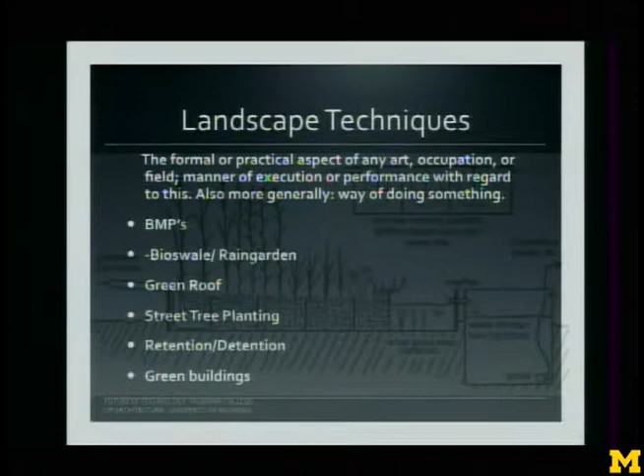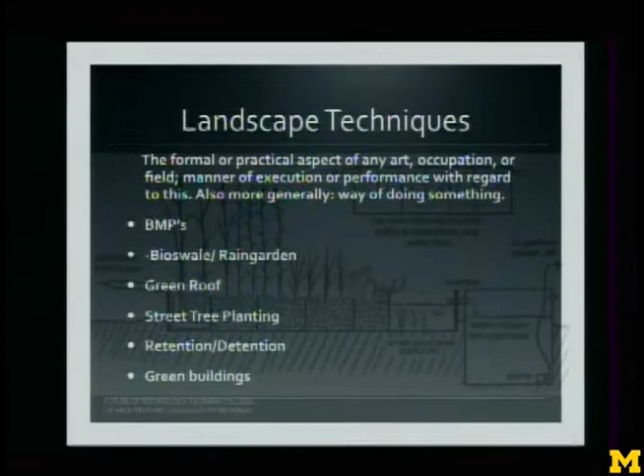I began to think about some things that are worrisome to me in landscape architecture - the standards have been created through these larger technological advances. Within landscape architecture there's almost a punch list of things we make, and we call them new technologies. These might fall under BMPs - bioswales, rain gardens, green roofs, street tree planting, retention, detention, green buildings, green facades, etc. And we lose sight of the actual real technological advance.

I'd like to suggest that maybe we should return to a larger discourse and think more about how we got to this place, and really begin to think about making landscapes that are much more performative - performative in a way that comes out of linguistics, where there is a response. The performer doesn't perform until they open their mouth or before they begin to dance or sing. This idea that the landscape can be activated, through human use, but also through a highly collaborative exercise between environmental designers.

I'd like to start with this first project. For me, how do we make these things disappear and become larger, more versatile interventions that allow us to experience real places and real things?

It's very interesting working on the new De Young Museum with Herzog and de Meuron. What's fascinating to me is that everybody always talks about the skin as this fantastic technological advance, but it's actually the building's base isolation - there's a 15-foot trench around the entire building. During an earthquake, the building will actually dance. Most people don't know that; it's not recognized within the dance of design.

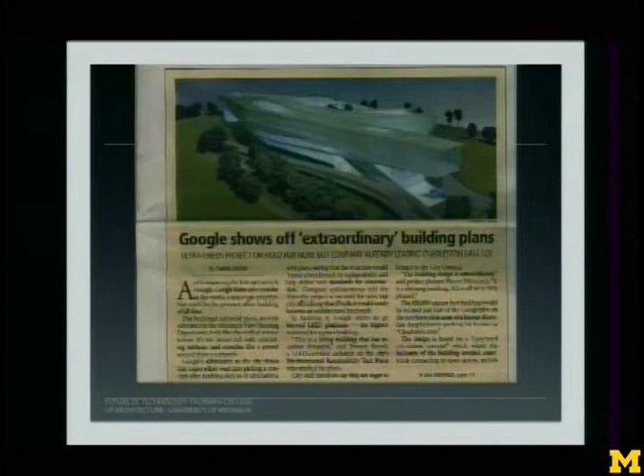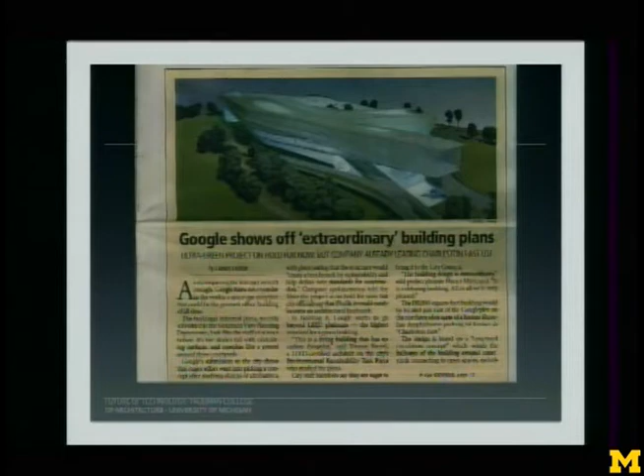This new building, I can only talk about this article here. This new building was developed about four years ago, and the idea between landscape architect and architect was a building that could think for itself in an environment set in a marsh, and could the building actually think? Through this rigorous collaborative effort between architect, engineer, and landscape architect, could we arrive at a new way to express multiple technologies rather than a single thing?

So basically I looked more specifically toward biomimicry as a new technology and a way to think about the Bay landscape. Here, scalability, as some urban designers might call it—can we work one-to-one with the environment in which we're actually making a building?

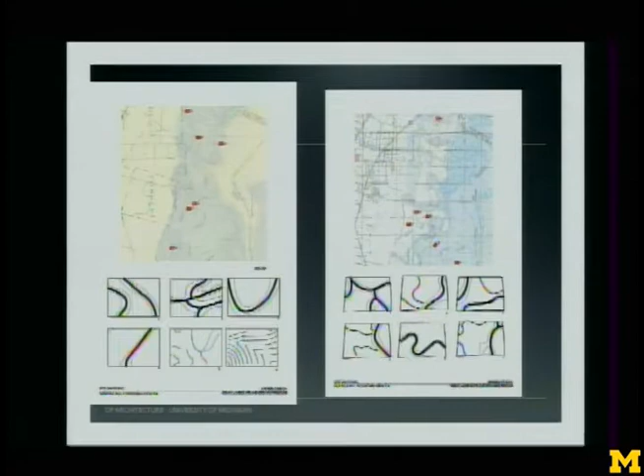These are basic samples from the San Francisco Bay at the same scale as the site. What you begin to see is one monumental move that's tied back into the dendritic pattern of the actual bay and the way water moves through it.

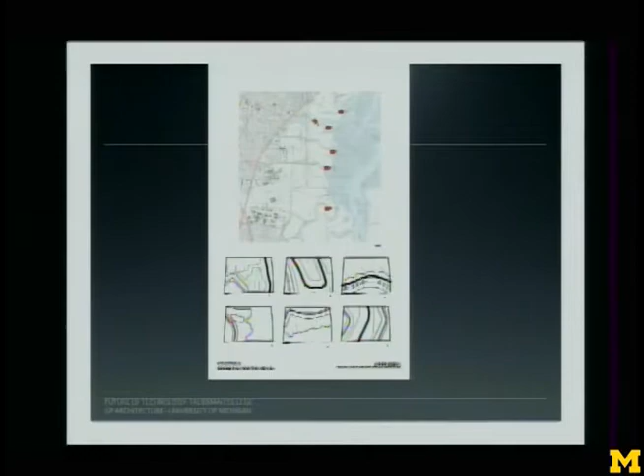This seamless experience, merging these technologies together, gave us one thing, which ended up being this larger bioline condition—basically a ramp with a flow-through planter that goes from the roof all the way to the ground. Its length is based on the scale of the dendritic patterns at the bay, so it's working one-to-one within that system.

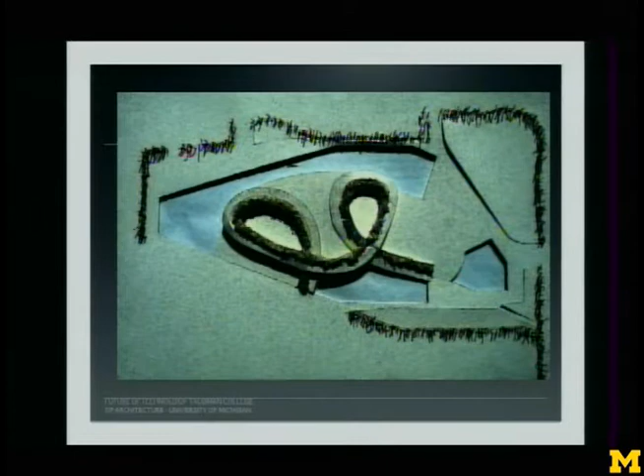The technologies that allow that to happen, from rainwater harvesting through facade studies, literally disappear, and we're enmeshed in the experience of the bay through these technologies.

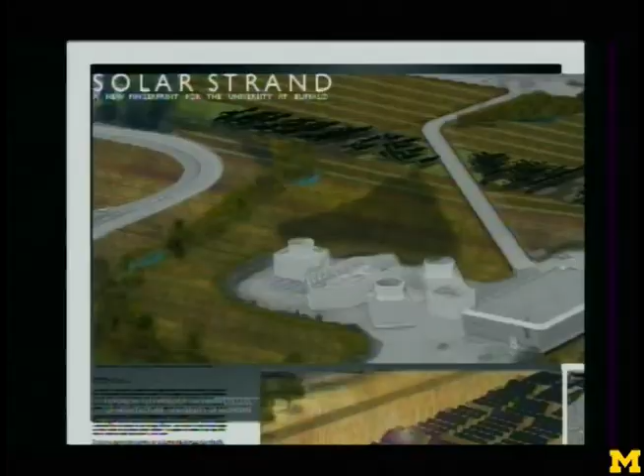This next project is a little more simple. The collaboration here is through a design builder and a landscape architect, myself, and we won a competition to place 5,000 PV panels, 3 by 5 feet, in a landscape for the University at Buffalo. What's interesting is that through the competition we understood the solar technology, but no one had an understanding of the landscape technologies at play at Buffalo.

You have to understand the history of the University at Buffalo: a landscape architecture firm designed this new suburban campus, and they basically moved a creek or river about 500 yards one way and filled the site in to put the new campus there.

So what happened with all this new alluvium is that nothing can grow there, because it's all bad dirt. For us, with the Solar Strand, we attempted to talk about the technologies that could restore this landscape back to its fertile origins, allowing even the simplest tree to grow. Through this we codified how the Solar Strand could actually sit within this landscape.

We used the DNA fingerprint and wrote a script that would allow us to place the panels in a quarter-mile-long row within this new regenerated landscape. This landscape will be constantly changing because they're constantly making new dirt, and this new dirt is tied to the solar array.

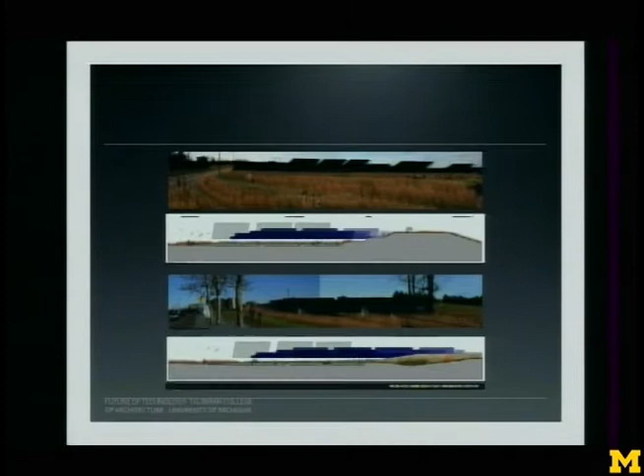But within that, this new regenerative landscape has the techniques to regenerate it hidden and embedded within it, and these two things create one experience. Your experience might be walking through this new quarter-mile-long solar array, but below your feet this landscape is recharging and constantly changing.

We just made a decision last week to not cut any of the landscape and let the native species find themselves there. We'll basically cut it once a year and let anything and everything grow there. Right now we have 63 species of plants that will volunteer.

Now we're in the construction phase, basically remaking the dirt here, and thinking about how the panels will actually sit through this codified new landscape.

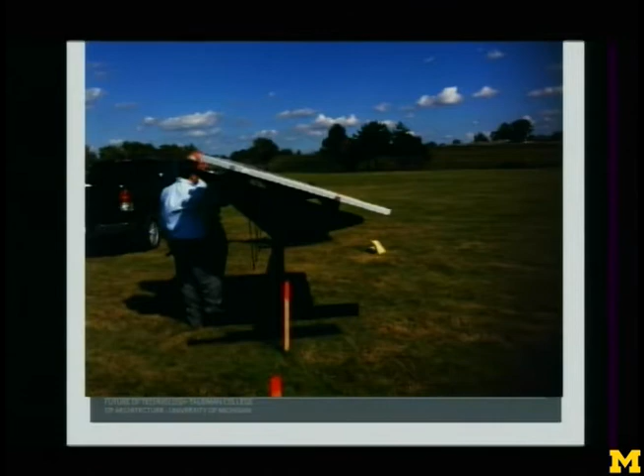And lastly, I wanted to talk about this final project, which is a new visitor center in downtown San Francisco. And this, again, is a collaboration between engineer, architect, and landscape architect.

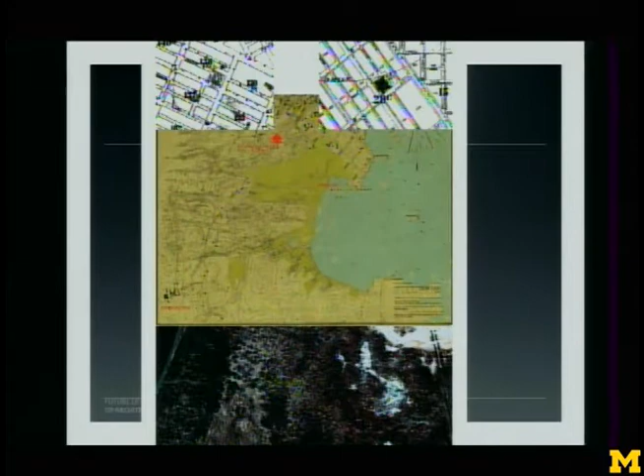Here, the technologies being used have to do with historic preservation, but also the ecology of the Bay Area. The new mint is old mint. It's about 150 years old, one of the few buildings that survived the San Francisco earthquake of the early 20th century. It housed, or below it, was the only potable water that could be used after the quake. So it has a very significant status within the city.

If you go to Fifth and Mission today, you have no idea that water is below your feet. The bay is three blocks away. You have no idea where you are. The building is being repurposed.

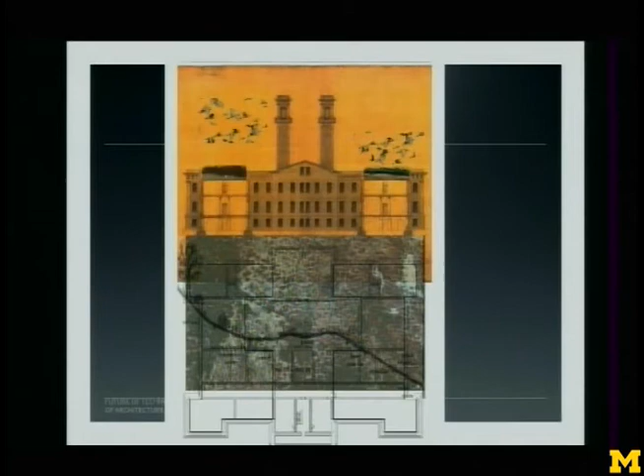On our way to repurposing the building, we found that the roof was built in the early 20th century, so we had a floor area that the historic preservationists couldn't touch. We exploited that. I suggested we flip the building and put the marsh that used to be there, that held the life of San Francisco, back on the roof, with this new performative structure basically preserving the building.

We were able to do this by thinking about the bay patterns of wet and dry, but also some of the technological advances within the bay itself, chip design and computer design. Working with the curators there, your first experience of San Francisco, of the city, will be through this new roof landscape that allows you to plug in and understand the hydrological patterns, the cultural history, and make your own decisions about what that real space is, because you will experience it, not the actual thing.

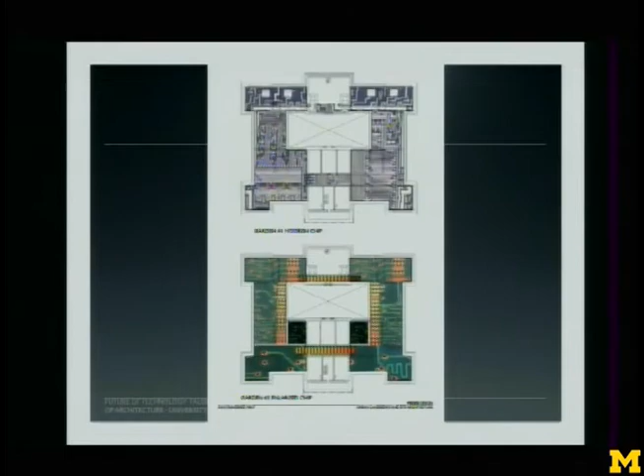So working with engineers, again, working with scientists, we're creating this new layer of experience on top of a pre-existing structure, so that the real experience of something that once existed now collapses back on top of you.

One of the workshops we held was a two-day biomimicry workshop where about 18 different designers sat in a room for two days and came up with a total scheme for the building. The one we moved furthest with looked at the redwood forest and its hydrological cycle, how the water moved from the redwoods all the way back down to the bay. So the building is actually becoming almost an aquifer for what's above and what's below.

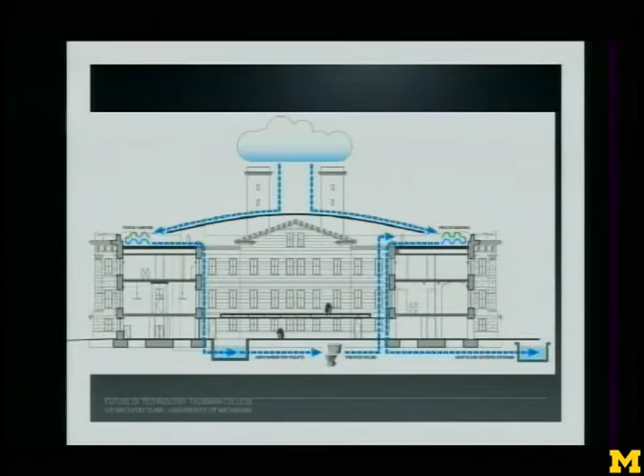The visitor comes in and experiences all of these things via these new technologies. Rainwater harvesting is a big piece we're dealing with, as well as new facade studies on the west and south sides. There will be a completely new roof that catches solar energy as well as protects inhabitants within.

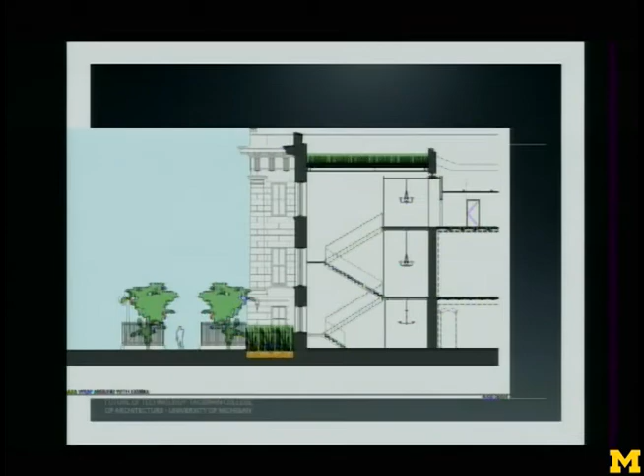The experience of this new space, again, isn't about one thing. It's not about what the building looks like, not about how the facade is developed, not even about how the flow-through planters that allow water to move through are exhibited. It's about a kind of total landscape where all of the techniques are enmeshed together to create one environmental experience.

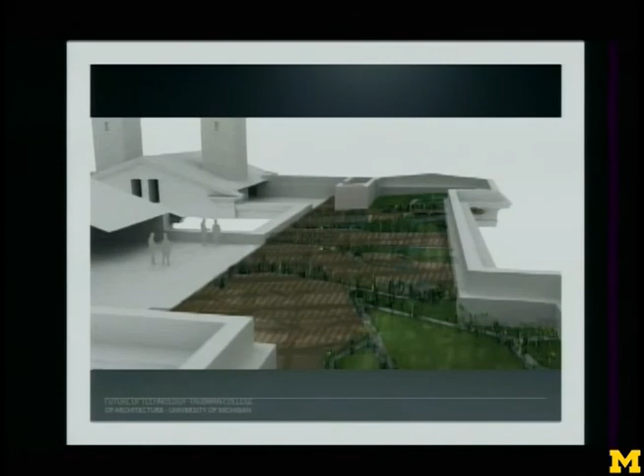Over time, particularly in the Bay—and I showed two projects in the Bay Area—what's fantastic about the Bay is it has a monsoon, meaning we get most of our rain during one period of time. So it's very easy to allow many of these things to come to the surface, so that people can be engaged within that environment.

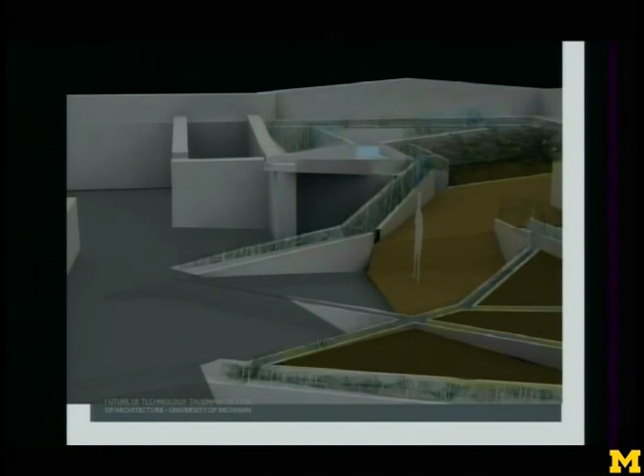I mentioned this notion of real environment and real experience a couple of times here, and I think what we must return to is this ability to allow each and every one of us to actually see the places in which we live and play and work, and to make our own decisions about how we want to interact with them.

It's very important for us, through the harnessing of all of these new technologies, whether digital or industrial, to allow not the thing to be present, but those spaces to be present for people to experience firsthand and to make their own decisions.